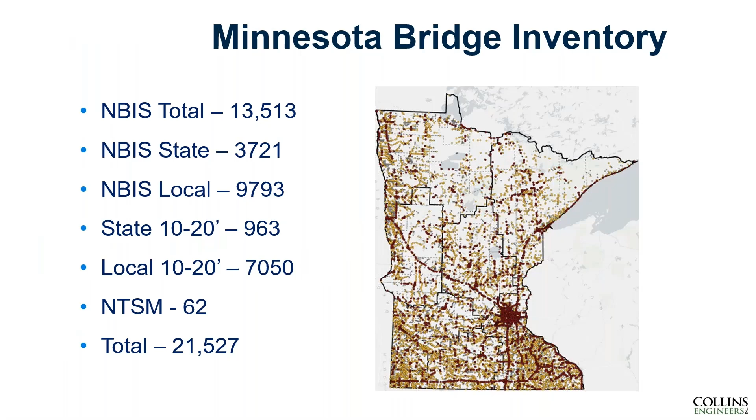A little bit about our bridge inventory. We have a state statute that defines a bridge as longer than 10 feet. So we manage over 21,000 bridges. We have a little over 77 million square feet of bridge deck area. So it's a pretty large system within our state. The MnDOT bridge office has about 140 staff. We have six final design units and 1 preliminary unit. Approximately 50 to 70% of the program is done in-house, so our final plans are developed substantially by our internal staff.

As far as bridge inspections, we very much have a decentralized bridge inspection program with over 350 team leaders that are located throughout the state. Local agencies perform all their own bridge inspections, which can be done either by consultants or in-house staff. But approximately 70% of local agencies are done by internal staff and the others by consultants.

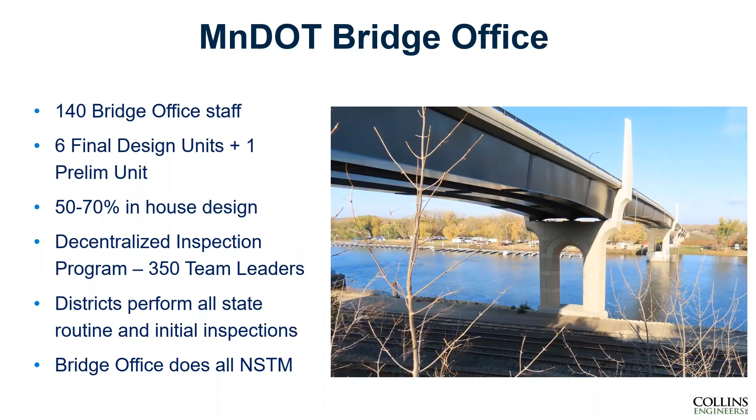For the state system, the districts perform all the routine and initial inspections as well as quality control. And then in the centralized bridge office, we have 7 staff that work on bridge inspections. They do all the in-depths, all the complex, all the NSTMs, as well as the training, certification, the NDT, quality assurance, all the policy pieces, and any innovative work like digital twins and AI. And I'll have Jen take it away.

So I am the head of our NSTM unit in the bridge office and have been so for the last 20 plus years. Barrett, I don't see the slide advancing.

So I guess we're calling this the birthplace of UAS, but I'm sure there's other states and countries that started this way before us in regards to bridges as well. We did start this in 2015, and basically it was just kind of a fun thing that Barrett shared with me. Barrett and I have been working together for many years now, and it was the end of a research phase of the fiscal year, and there was some leftover money that needed to be spent by our research department, and Barrett showed me there was a talk at the University of Minnesota about farmers using drones to monitor their crops. And we thought, wow, maybe we could do this with bridges for inspection purposes, having a flying camera on places that we can't usually get to if we don't have a snooper or an underbridge inspection vehicle.

And we thought it was something that would just be fun, play with a toy or whatever, would be a good idea to just see. But we were soon met with stop signs, one being the governor and our aeronautics department saying, wait a second, we need to do this right, because there's privacy issues, something that we don't really think about too much in regards to bridge inspections. We're looking at a bridge, we're not looking for people or looking at people, but they had that

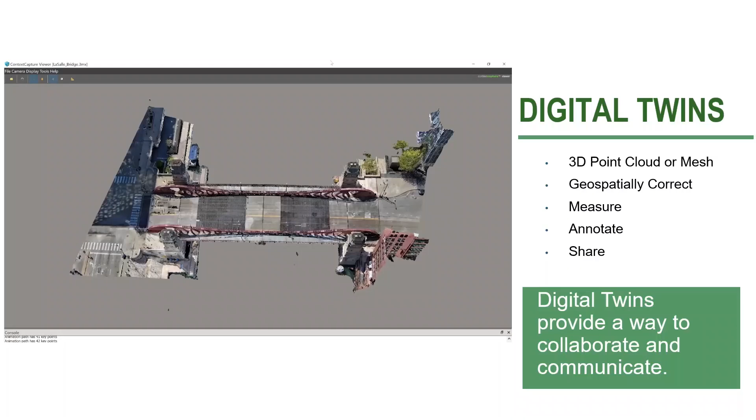we are now. Collins has been our go-to consultant that we utilize to help us go through these phases of research and keep up with the technology. Barrett is their UAS coordinator for their consultant group, and they've conducted bridge inspections with UAS in almost every state now. So what we thought was going to be a little fun project has become something way bigger than we ever thought.

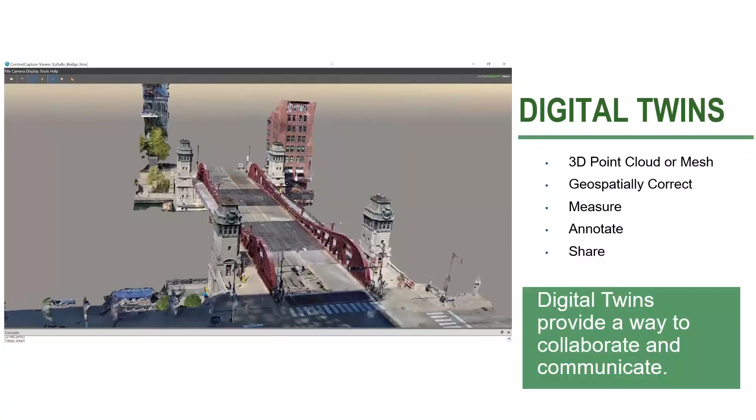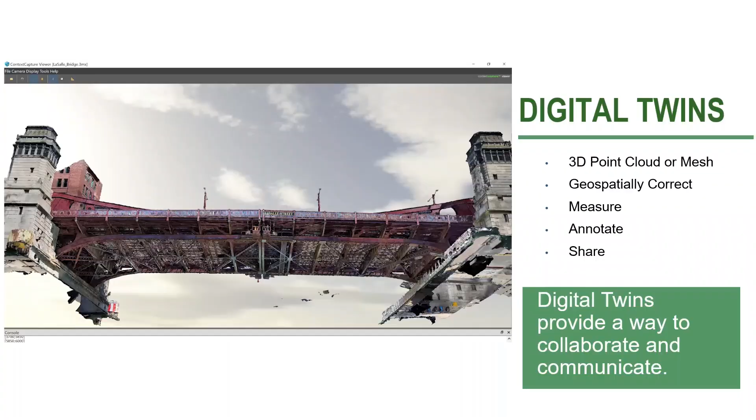So digital twin, which is what we're here to talk about today, is a digital representation of a physical asset. As you can see in the video here, it puts out 3D point clouds or mesh. They're geospatially correct, so you can measure items or defects on the bridge. You can annotate or add notes, and you can share the link with other people across the department or whoever you're working with, the bridge owners. So it's just a great way to share information that we as inspectors see in the field, better demonstrated than still photos from a camera.

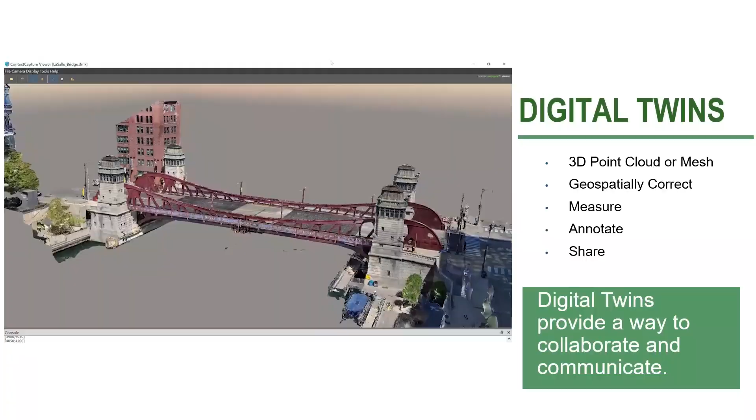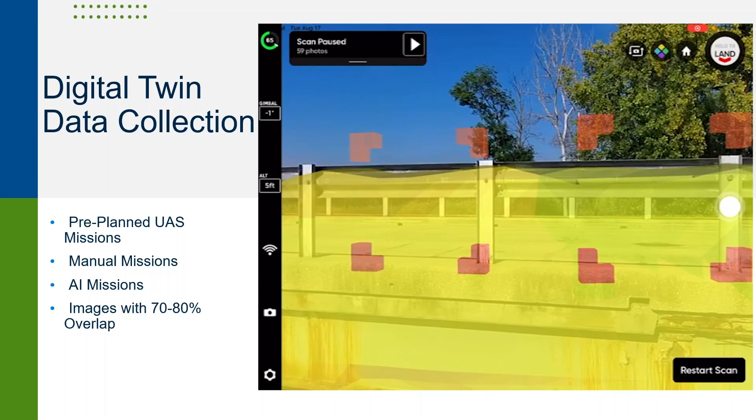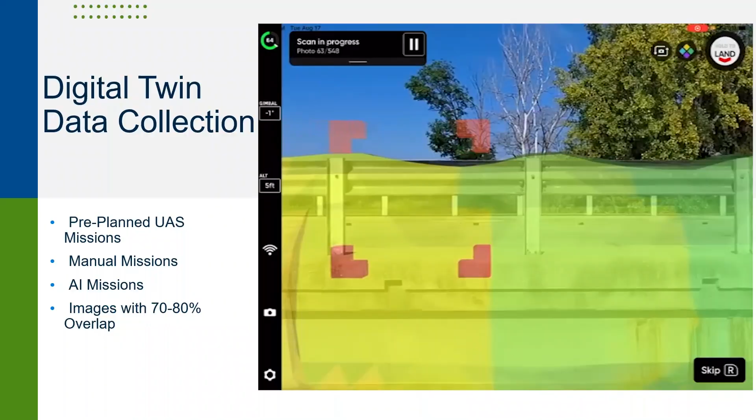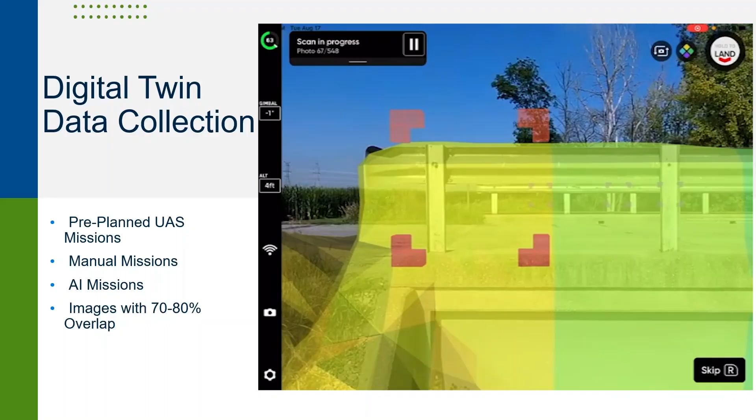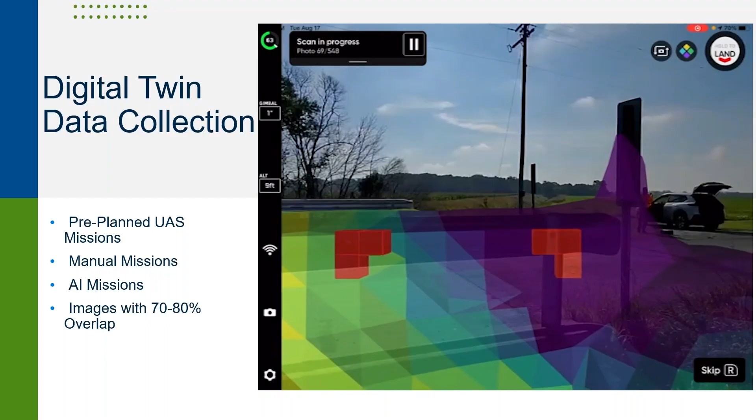So here's a digital twin data collection. We can use these as well for pre-planning UAS missions or pre-planning inspections by utilizing drone footage. The Skydio 3D scan here is an example of using artificial intelligence for data collection. Skydio is the brand of the drone, manufactured in the United States. You simply define a volume to scan, as shown here, and the drone explores that space, calculates what needs to be scanned, and performs the scan autonomously. The grid represents the object to be modeled, and the color changes from yellow to green as data is collected.

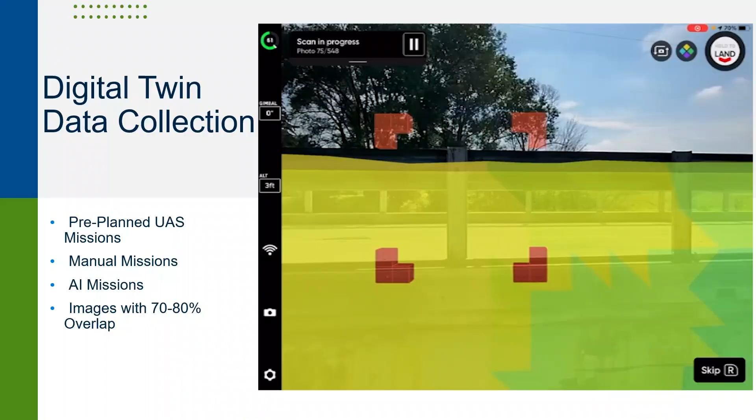And with any of these, they can be manual missions, or they can be autonomously done. Your overlap, though, with either camera or drone has to be 70 to 80% overlap to get a really accurate depiction of the bridge without any gaps or spaces in it.

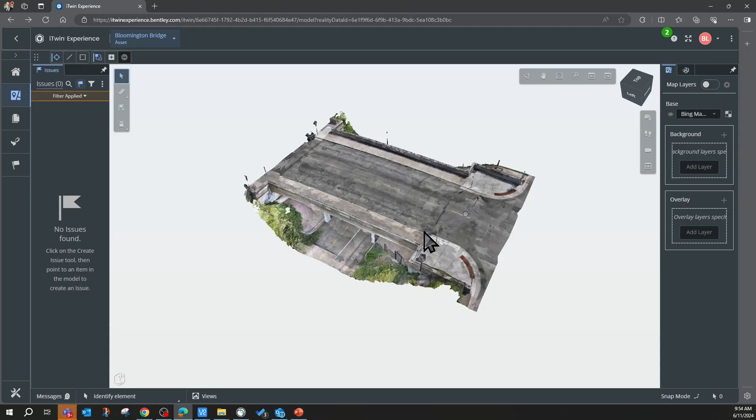Okay, this is an example of a complete digital twin of a bridge, demonstrating how we can manipulate the model to see the underside of the deck and measure defects. Not seeing the video move along too fast yet. But as you can see, this is the Bentley iTwin Experience software. Here the bridge is going now.

And you can add information on the digital twin by adding element notes, any kind of note. You can move it around. You can see from up underneath the deck. It's kind of like the little Google guy on Google Maps. You put the guy on the roadway and you can walk around and look. It's the same kind of concept.

And what's nice about the Skydio drones too is that they have sensors that can get up close to the bridge without hitting the bridge. So they have object sensing avoidance. And you can see here, this bridge is not in that great a shape. And you can see there, we're measuring out an area of spalling underneath the deck. So it's very important for bridge inspections. We need drones that have cameras that can look upward as well and have obstacle avoidance.

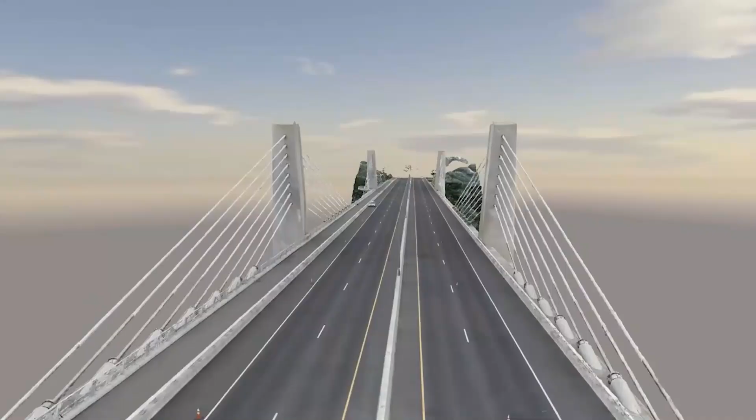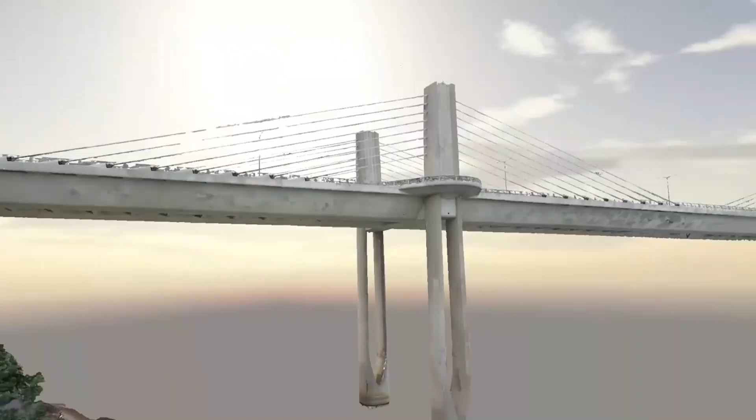All right, so this is a 3D digital model of our St. Croix River crossing bridge. It's an extradosed bridge that spans between Minnesota and Wisconsin. And when you look at this, if you know the Matrix or Minority Report movies, they have digital twins or things in the air that they can manipulate and move around with their hands. It's kind of similar to this. We did that with the Microsoft HoloLens when we had those. It's pretty trippy, but it's like you're there at the bridge and you can see things.

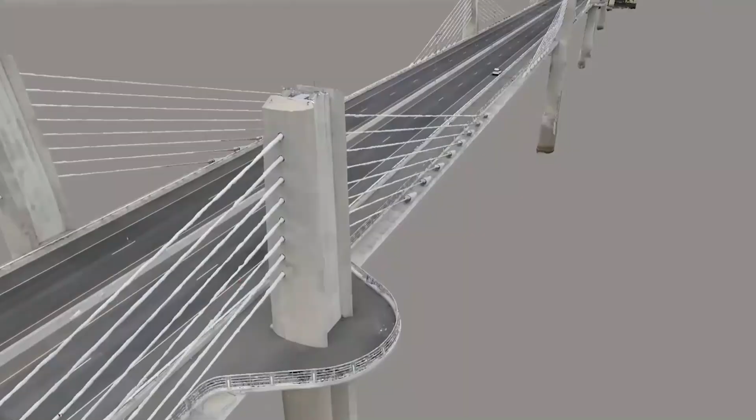And the amount of data that we can get is so much better. You can even do crack detection, as you can see with those blue lines on there. And Barrett will talk more about that later. So it's basically a virtual space where we can visit, meet, and collaborate on our findings across many different entities. If I'm seeing something in the field, I can upload this post-processed digital twin and share it to load ratings, design, construction, maintenance, and across the different districts so that everybody can see what we see in the field. Because sometimes it's hard to visualize from just a photo.

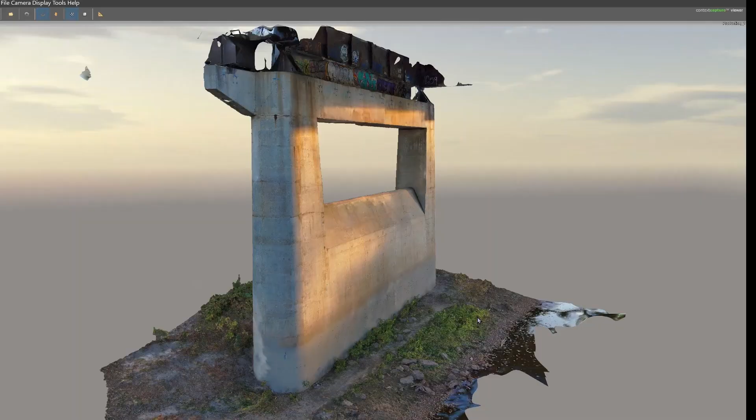So you don't have to do a whole bridge to have a digital twin either. It can be created for individual bridge elements such as this pier. And this pier supports the Cedar Avenue Bridge in the metropolitan area here, right by the Mall of America. I was just on that this past year. And this was used to help perform a load rating analysis. You can see the imagery here, how great of a quality you get. You can even see the graffiti on the bridge.

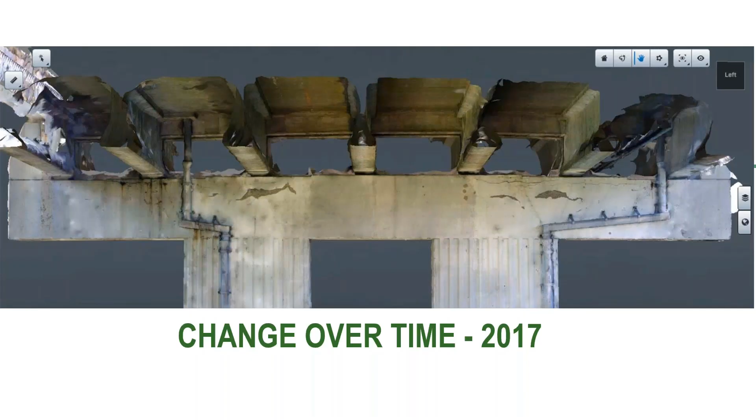Digital twins can also be used to show changes over time. This pier is part of the Kellogg Boulevard Bridge in St. Paul, Minnesota, and shows the deterioration over a 6-year time period. That's in 2017, and then the next slide is 2023. You can see how much has happened since then. So this is great for capturing images over time without having to go back through inspection reports and lots of files and photos to get an image up that you can see readily.

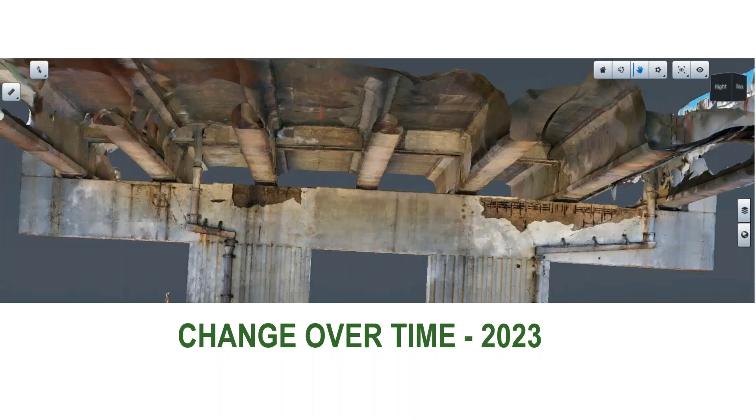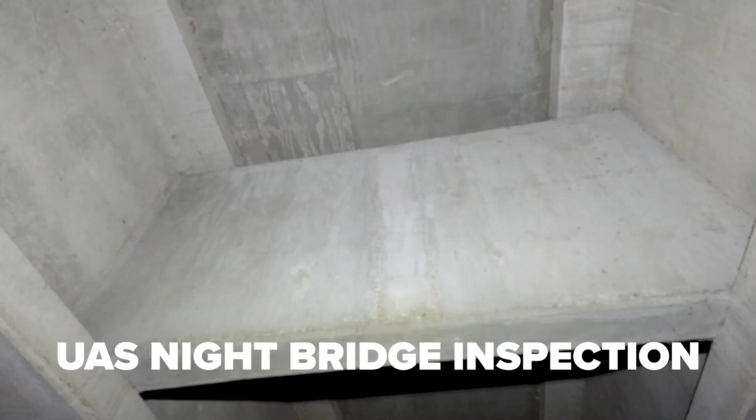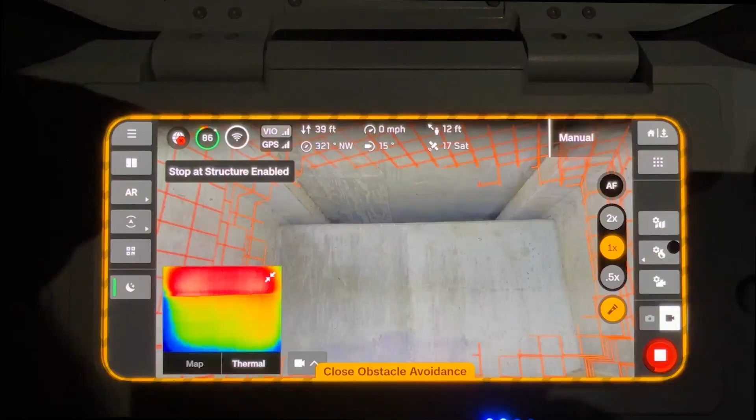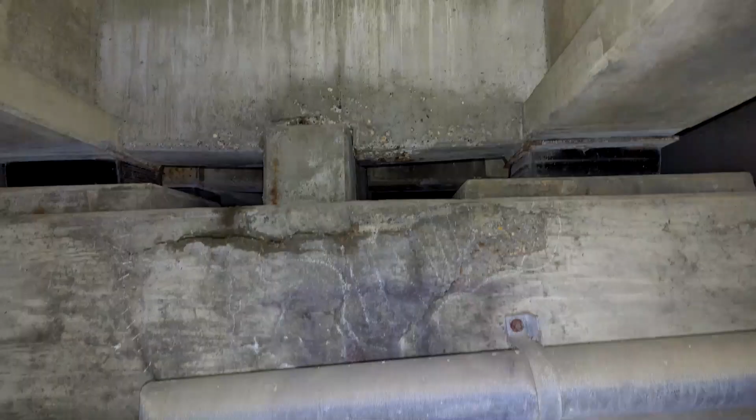We can even inspect and collect data at night using the Skydio X10 drone. Again, the Skydio drone is manufactured in the United States, with additional lighting modules that are a payload on the drone itself. And you can see just by this video here how great the lighting is. Not sure if any other states have as many bridge hits as we do, but they usually happen at night. So it's nice to have the ability to go out at night with a drone to get a visual of what you might need to see, or have someone analyze to see if a lane closure or a bridge closure is needed if a bridge is hit.

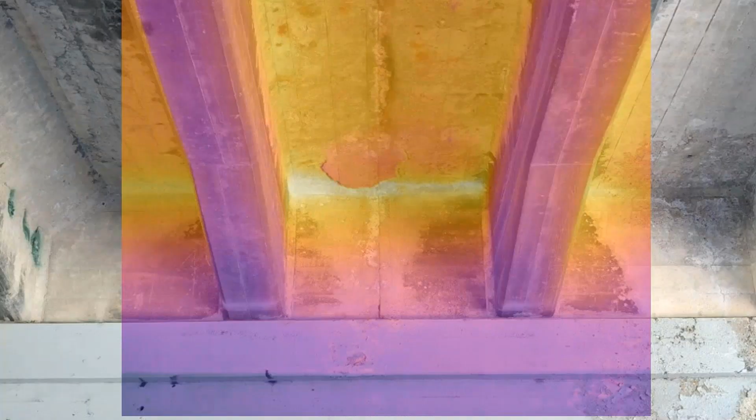And you can see the areas of delamination by the hot spots where it's more red. That's where you're having your delamination set. And this can be done. You have to do it during certain times of day. Barrett can get into more of that in his later slides. Because you need the deck to be able to heat up to a certain point within the day, so you can get that difference that you're looking at in the photo here. But it comes out pretty well.

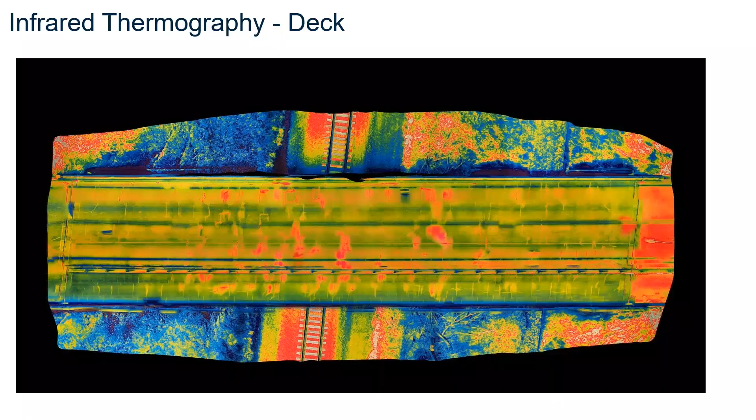And with that, Barrett, I think you're up next with the culvert example. Okay, thanks, Jen. And thanks to MnDOT and Jen and Ed for the opportunity to work on this. It's certainly been an interesting 10 years and a really fun technology to work on, and seeing it grow throughout the country.

So for the rest of the presentation, I'm going to talk through a culvert example, talk about how we're using AI for defect detection, how we're using the digital twins to do bridge virtual inspection training. I'll go through an example of a large-scale bridge project and talk about how we're incorporating the technology into one of those large projects. And then we'll go over some benefits, and then we'll go to questions.

So this is just another example. This is something we just did a couple weeks ago, and maybe gives us an idea of how we can use this technology on even just routine normal bridge inspections. This is a metal culvert that we did a couple weeks ago, and just to give you some idea of the level of effort, the whole flight was probably about 10 minutes long to collect the data for this.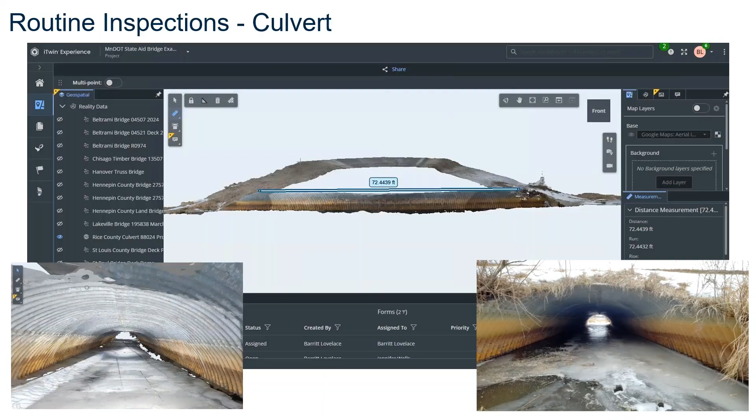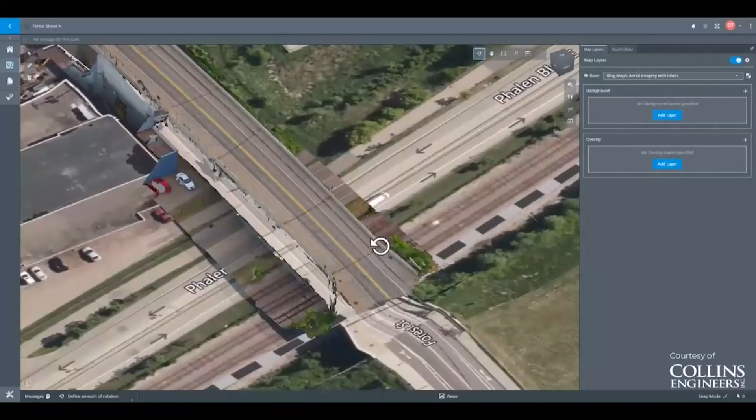The next thing I'm going to talk about is how we're using AI for analysis. And this is an example of a bridge where we just flew the deck, so we're flying over the top. And I would encourage everyone, if you're trying to implement this technology, this is a really good low-hanging fruit way to start, because we're flying over the top of the bridge. It's pretty easy to fly, pretty easy to process the data. And the bridge deck is one of the most important components of the bridge to collect.

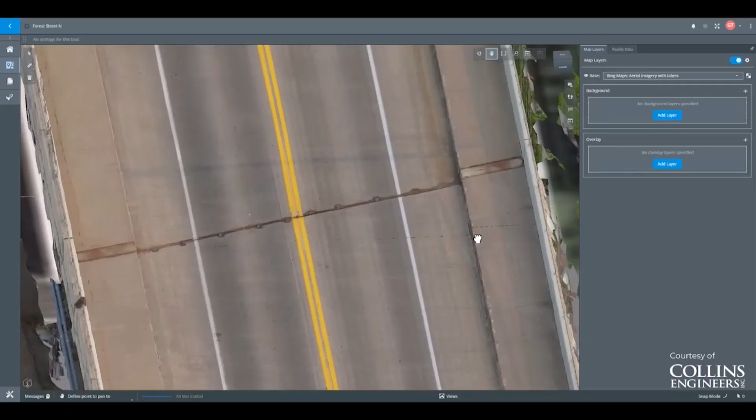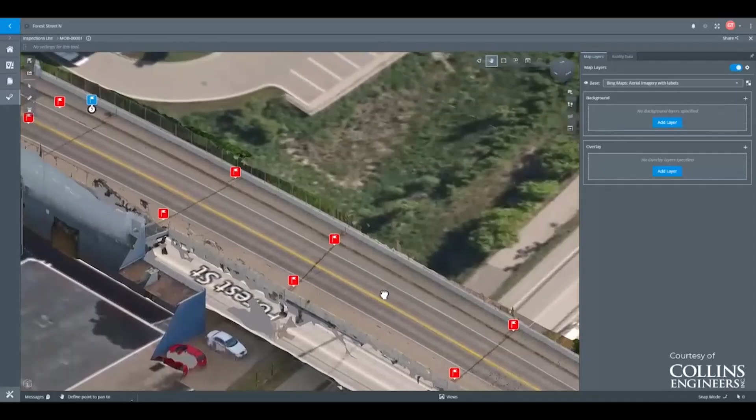And in this case, we are able to apply an AI that we helped develop with Bentley, which helps us find cracks, quantify the cracks, and then overlay those cracks onto the 3D digital twin. And those of you that are involved with inspection understand this, but this is a fairly decent sized deck, and the level of effort to go out and actually measure all of the cracks on the bridge deck is pretty significant. I would estimate for this bridge, it would take 2 people at least 2 or 3 days to measure and sketch all of these cracks, but we can do it with AI in a matter of maybe an hour of the computer processing the data. So it's a real time saver, and we're getting better data as well.

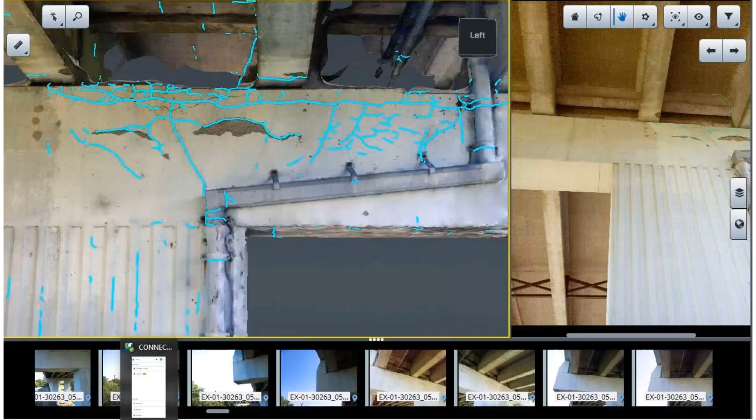Another example, and hopefully the slides are caught up, but this is the Kellogg Avenue Bridge in St. Paul, and it's one of those pier caps that maybe people are familiar with, where the code changed at some point and the reinforcement requirements changed, and so some of these piers had shear cracking at the pier caps, and so we were able to fly it, perform that AI analysis, and then see those cracks right on the pier cap.

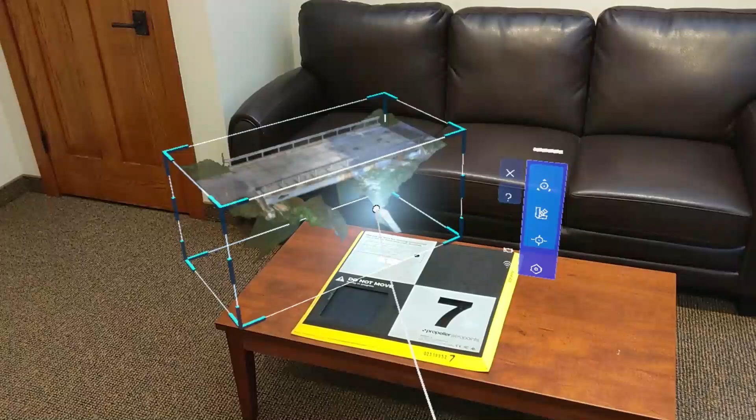And you can see from the image too that there are some cracks along the pipe that probably aren't really cracks. But part of this process is we have our engineers go through and look for those and delete false positives. So sometimes a joint might show up as a crack, but we can just easily delete those. So we're not completely relying on the AI. We still have an engineer involved to do quality. And once we have these digital twins, there's lots of different ways that we can view and digest this data.

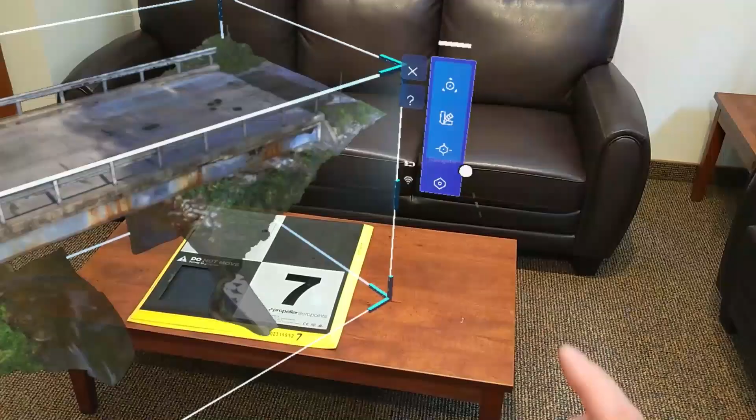The most common way, obviously, is to be just viewing it through our computers, and we can do that. All of these models can be imported into CAD, or we can view them in the iTwin Capture software itself, or we can share it via the cloud on the iTwin experience.

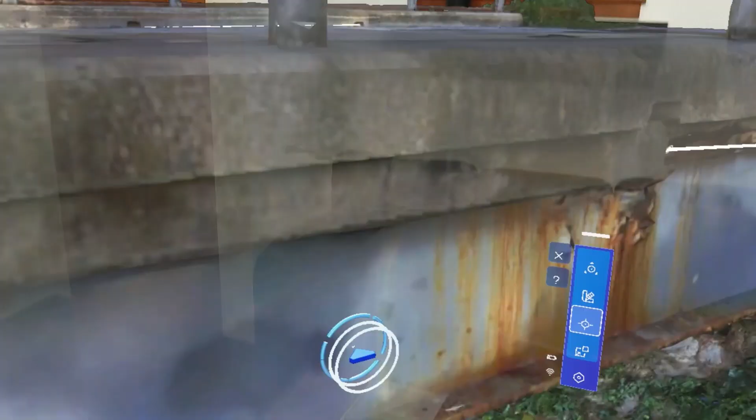But this is a novel way that we can also view them, which is through the Microsoft HoloLens. And the advantage of this is that we're seeing the bridge in the same scale that we would see if we were doing the inspection in the field.

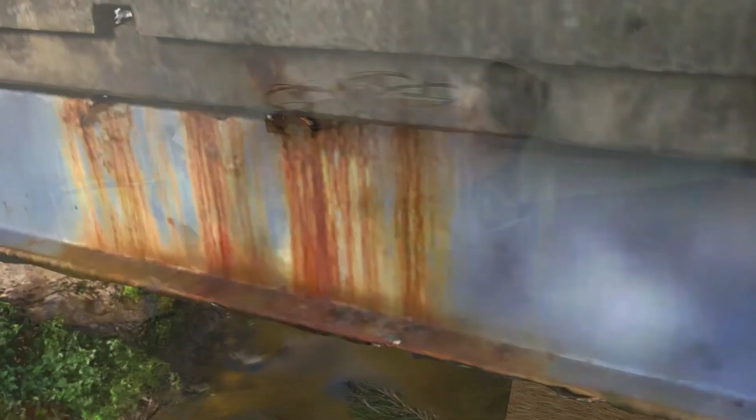So for instance, maybe we had a load rating expert that was in a different office in another state, and they can't visit the bridge, from a budget standpoint, or just the logistics, or maybe they're just not a field person. They can do this virtual field visit, and it's not as good as being in the field, but it much more closely approximates being in the field, and they can get a sense of the bridge and look at defects and perform their load rating based on some of this information.

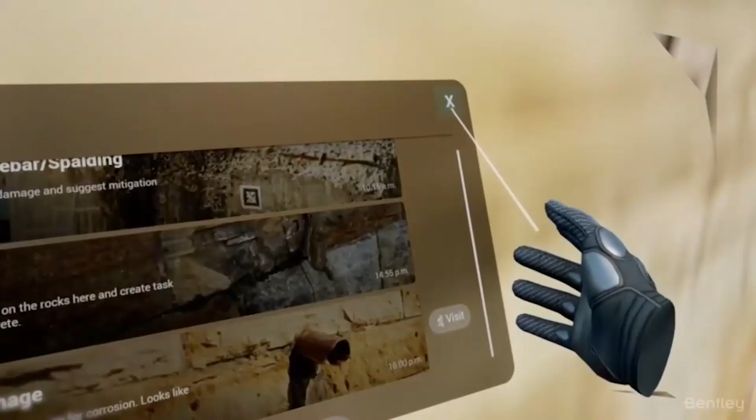So another way that we can view the data is through the Unreal Engine. So if any of you have teenagers like I do, this is the same engine that runs a lot of those video games, such as Fortnite and others, but it's really good at rendering these really heavy data sets really quickly. And so we worked with Bentley, and they developed this Unreal Engine based model, almost like we're kind of gamifying the bridge inspection, and we can use this then for training, or just for having our engineers view the bridge and see some of the defects firsthand.

And this bridge is a stone arch bridge in Minneapolis. It crosses the Mississippi River, so being able to get down to those piers to look at things is pretty difficult. We have to go through locks and dams and get a boat up there, or do rope access, and so that's challenging and expensive, but we can do it also in this kind of virtual environment.

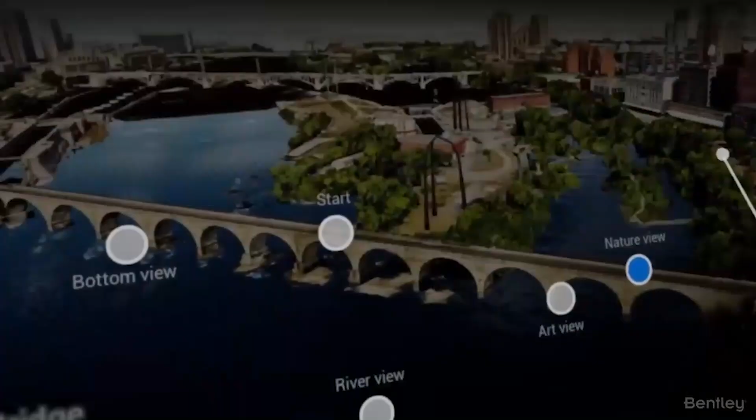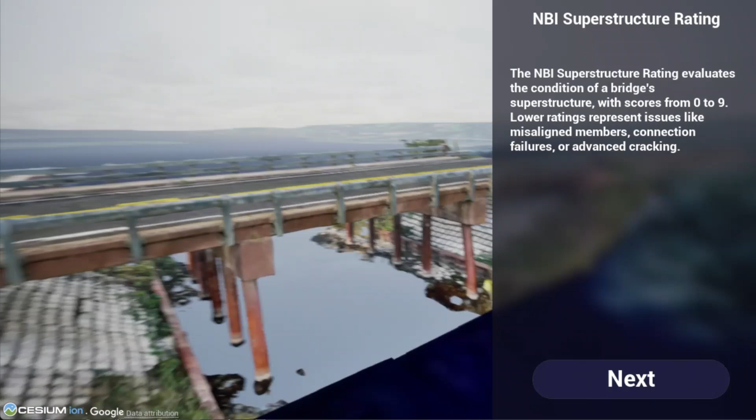And another thing that we are developing for the MnDOT state aid group is an inspection training platform where we're using Unreal Engine, and inspectors will be able to go through and inspect 6 different bridge types in different locations, different scale of bridge with different types of defects. And they can go through and answer different questions about the bridge, and they have to rate some of the NBIs and element ratings.

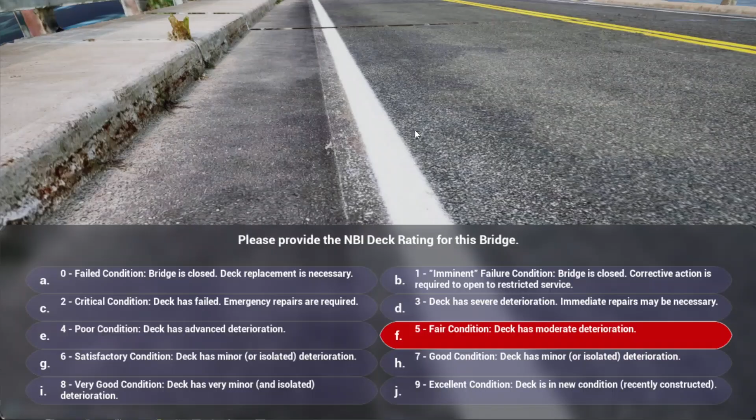And while it's still not as good as physically being in the field, an inspector could do training on these 6 different bridges in just a few hours versus having to maybe travel all over the state to get exposed to bridge types that they aren't normally exposed to. So we're really excited about making this public here in the next few months, and provide this training opportunity for inspectors.

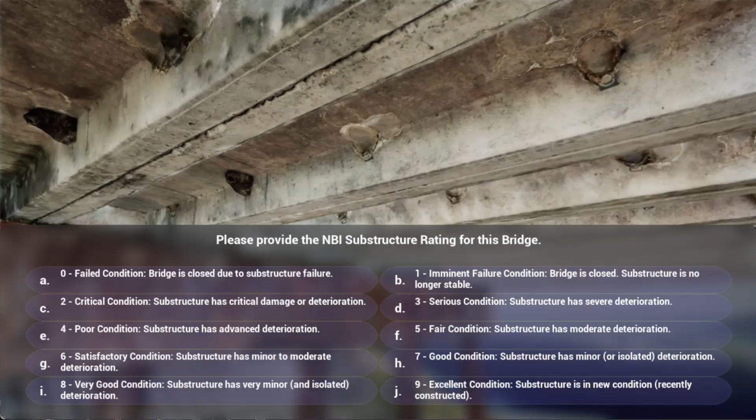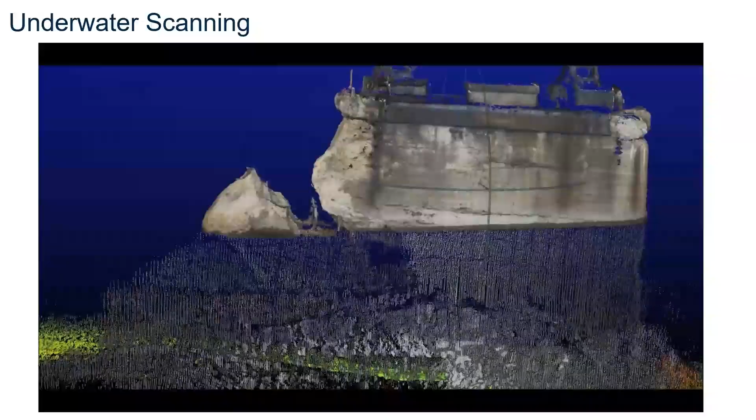And you can see here, obviously, where the fracture is up above water, but we're tying it to the below water, and we can see pretty easily the extent of that fracture underwater, and then use this to plan the repairs and those kinds of things.

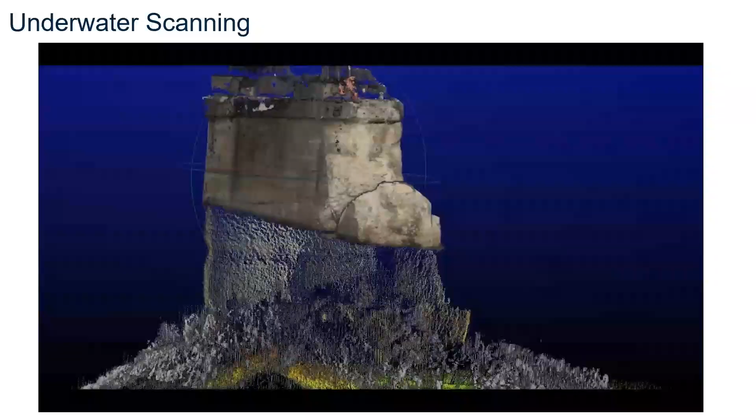So we've talked about some of the different technologies and examples, and now I'm going to go through how we're using this as part of a larger bridge project. And this is the Robert Street Bridge, which is in downtown St. Paul, crosses the Mississippi River. It's a concrete arch bridge. And so we worked on a team with Michael Baker to do a bridge management plan. And our workflow was a little bit different than we normally would do.

So the very first thing we did is we went out and captured the data in the field with the drone. We post-processed this information, and how we're doing that is we have these rendering computers that we are using. And so they're like gaming computers that can render this data really quickly. And so we create these digital twins. We did it span by span.

And then the unique part of the process is that we did an office pre-inspection. So the same engineers that would eventually go out in the field just use the digital twins and put as much inspection information in there as possible through the cloud platform.

And then once they have all of that in there, then they go do the actual field inspection. And since it's pre-populated, they're just verifying that a lot of the data is correct in the field, and maybe making some small changes to things that they already had, or if there's new stuff that they found that they couldn't see in the digital twin, then they add that to the digital twin in the field. And so there's a lot of efficiencies, and it made the inspection go quicker in the field.

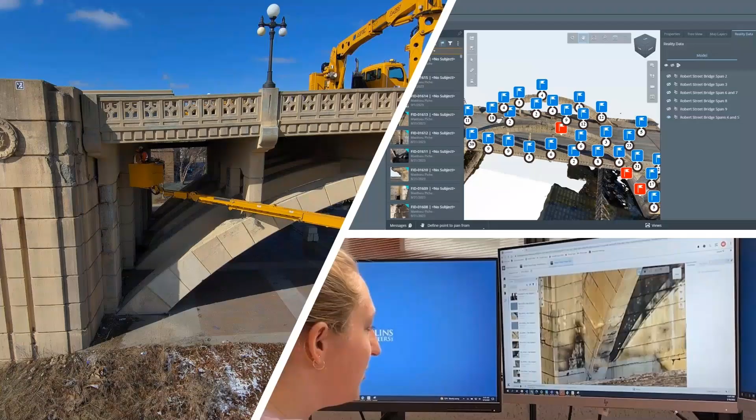And then we use that data to develop a bridge management plan, and eventually we'll do rehab design plans and then construction. So this just shows how we're doing the normal inspection. We're not trying to replace the field work at all. We're just trying to improve the quality of it and make it more efficient. And you can see one of our engineers, Katrin, is pre-populating the data in the inspection model before we go in the field. And then you can see in the upper right what that looks like after it's input.

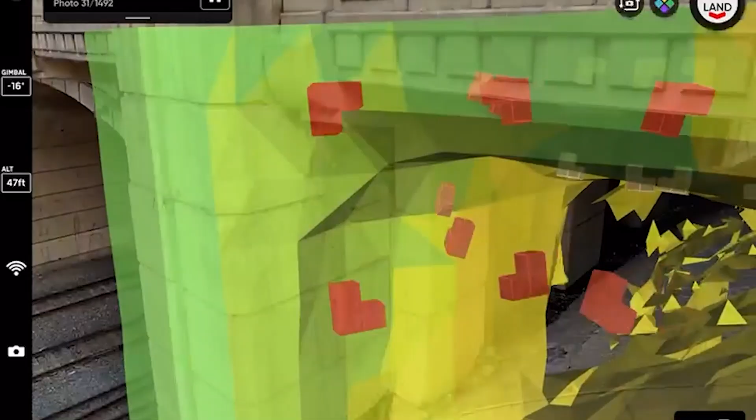And Jen showed some of the automated missions. This is one of the spans of the bridge with the Skydio drone doing an AI mission to collect all the data. And it's pretty interesting. In the 10 years that we've been doing this work, it literally went from being really nervous flying close to a bridge and having to be very attentive to what the drone is doing, trying to have really good pilot skills to do it, to now, we are almost bored waiting for the drone to finish.

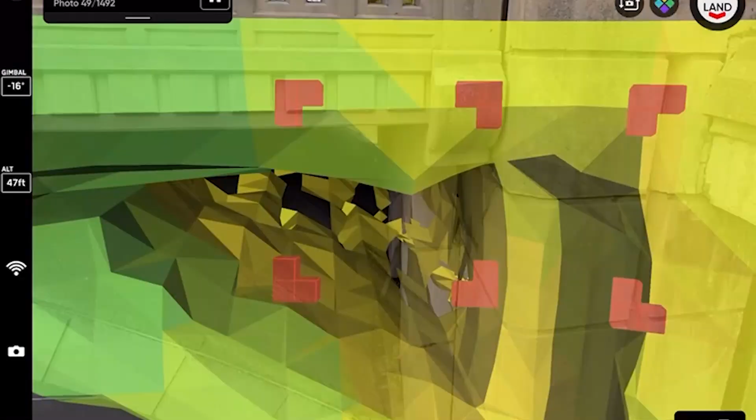But the other advantage is also that the quality is much better because the drone, when it's flying these AI missions, it doesn't miss anything, and it's always getting enough overlap to create a good digital twin. So this is a pretty big game changer for us to be able to do this work. And then this is what it looks like when the entire bridge is turned on on the cloud platform, and we can see all the spans.

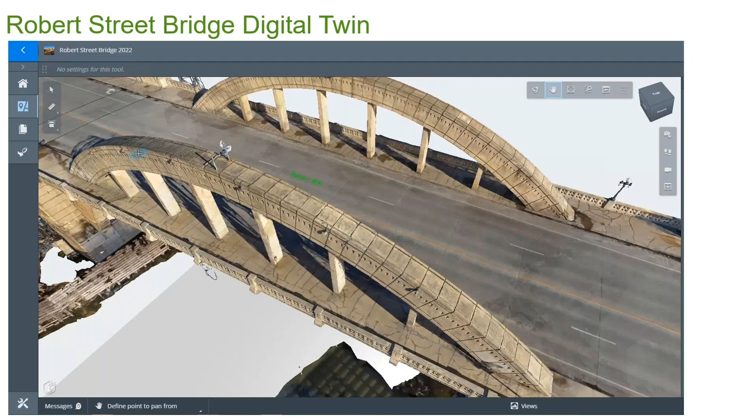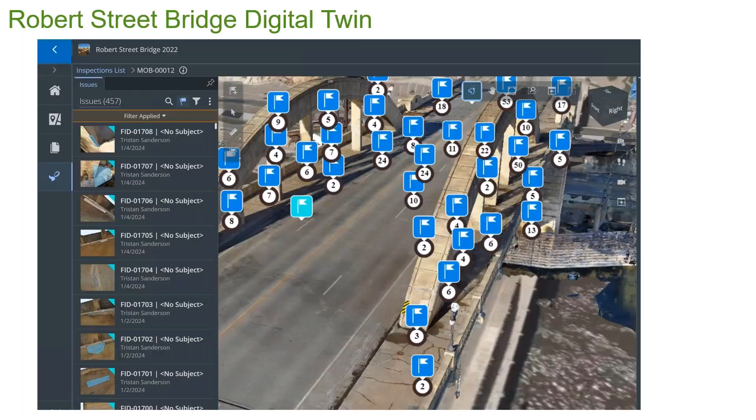And on this bridge, we had thousands of inspection notes because we're doing a very detailed inspection. Doesn't necessarily mean that we had a lot of significant defects, but just a lot of defects in general. And one of the big advantages is that we no longer have to describe where a defect is, which can be very time consuming, trying to describe what span it is, what beam it is, or what column, and what is maybe the distance from the deck. So that streamlines that whole process.

And then on this slide, we're showing one individual inspection note or defect. On the left, we have our standard information that we always show, which is the inspector and a description of it. In the middle, we can see where we drew out the delam or spall and get the area, so we don't even have to measure it in the field. We get that measurement through the model, almost like in CAD. And then on the right, we have all of the pictures associated with that spot on the bridge. And we might have 8 to 10 different pictures of any single area of the bridge.

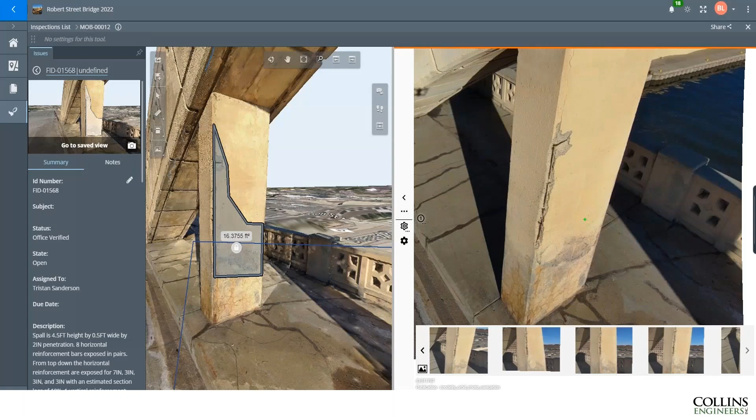And then we also applied AI crack detection on this bridge as well. And so we can see all of those cracks, even if we're not quantifying it, which we can do, but just being able to see the density and get an understanding of how many cracks and what the density is, is really helpful.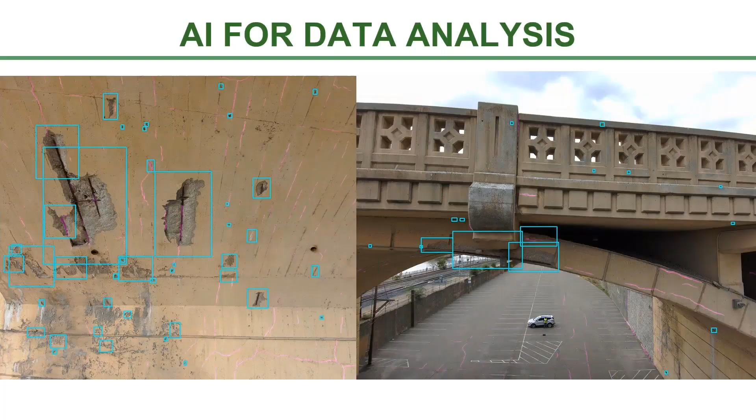So we have these models, we have all of our inspection data input, but it's important to understand that we still have all of that data in like a database format. So each individual inspection note is in there.

We can sort it by who the inspector was, what type of defect. We can understand how many spalls we have, the total area, information about how long the inspection took. But the big game changer too is that we can use it as a method of quality control. So we have a more senior engineer go through each individual item and do a quality check.

And if you do that in a traditional sense, you'd have to do a completely independent field inspection, which is not something we can do. We usually don't have the budget to do that. So this is a good way to introduce quality control in the process.

And so some of the benefits, we have a pretty significant cost savings from the inspection efficiencies that I talked about. I think more important, we're seeing cost savings just because we have much better data, and that data is easier to digest. So we're making better decisions about what to do with the bridge. We have a significant improvement in the quantity and quality of the data.

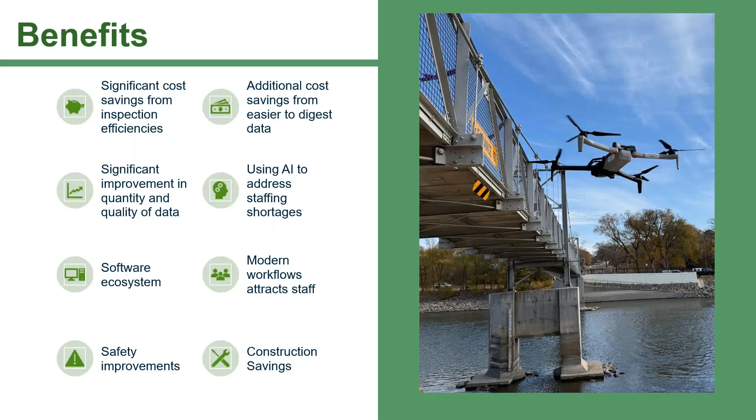And we're using AI to address staffing shortages, but also to attract staff just to make the inspection process more interesting. And then we have safety improvements from less traffic control, less working from height, and then we turn over the digital twin to contractors. So we're seeing savings in that area as well. Now I'll turn it back over to Jen for some lessons learned.

Thanks, Barrett. So lessons we've learned along the way over the past 10 years is implementation is critical. You need to start off slow. Don't reinvent the wheel as well. If other states have done it, we share all of our research and the steps we've gone through, our UAS manual. We share all that with other states.

I've been around the country quite a bit doing EDC 5 peer exchanges, presented at lots of webinars such as this or at conferences. We're willing to share whatever we have to help others get started with using drones for inspection purposes. Education component is also important, as Barrett talked about with the training. Just doing your Part 107 too is pretty good information as well.

And we found that partnering with other technology providers has been really helpful to us, such as Bentley with their digital twins processing, using our own inspection manual photos for their software for the AI to learn what is a crack and what isn't a crack, helping out with Skydio, partnering with them to make their drones better, because they're asking us, what do you need from us? What do you need in order to do an inspection better?